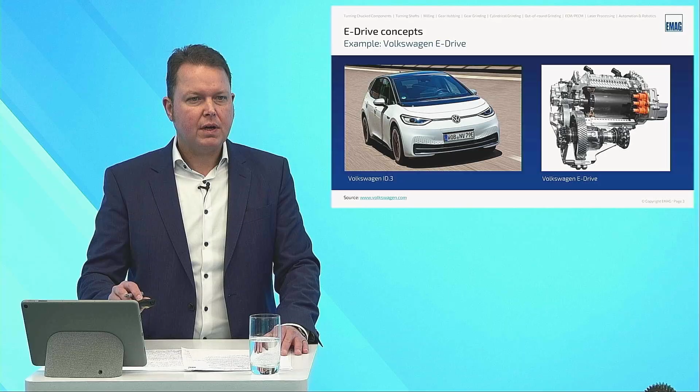This is a Volkswagen ID.3 on the left side, and on the right side we see the drive unit. This is the e-drive. It consists of the electric motor on the right side, and on the left side we have the transmission. If we dip somewhat deeper into the detail, we can see the drive structure.

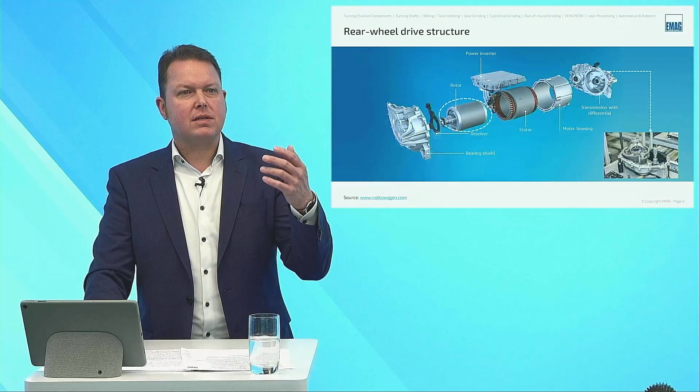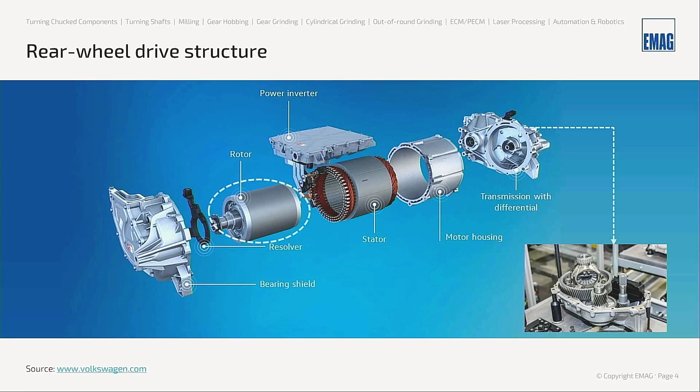It consists of the rotor shafts. In the middle left side, you can see the rotor, and inside it is the rotor shaft we are going to talk about today. Around it you will find the copper coil, which makes it the rotor. The rotor then sits into the stator. A motor housing covers the whole thing, and then we have a bearing shield assembled from the front. From the rear comes the transmission with a differential and its housing.

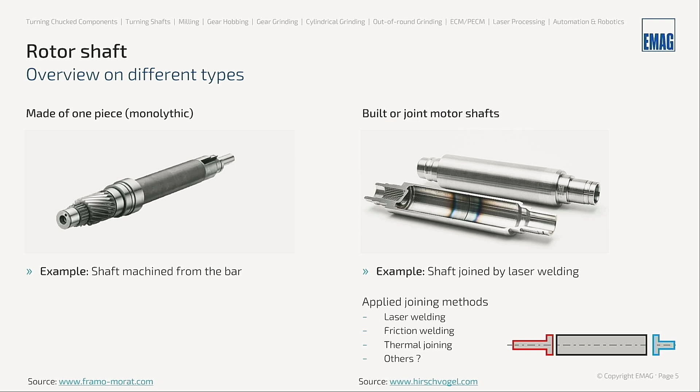Let's take a look at these different kinds of motor shafts that we know. We classify these as monolithic rotor shafts, meaning they are made of one piece, usually turned from the bar or from sawn pieces. Alternatively, on the right side, we have built or joined rotor shafts, consisting of at least two or even three pieces that are joined with a certain method - predominantly laser welding, or sometimes friction welding and thermal joining.

Another differentiator among rotor shafts is the interface to the gearbox or transmission. Here we see the e-drive again, with the left side zoomed into detail, showing the interface between rotor shaft and input shaft. This interface can be designed in different manners. For example, on the lower left side, we see a joined rotor shaft that has an internal spline.

The rotor shaft has the internal spline and the input shaft has an external spline. These splines are not actually considered two meshing gears - they just make sure we transmit the torque, which is how it transfers from the rotor shaft to the input shaft of the transmission. Of course, we can do this vice versa as well: the rotor shaft may be made with an external spline, and then the input shaft has an internal spline.

An alternative design is shown on the lower right side. This is a rotor shaft where we already have the geared section, meaning the rotor shaft and input shaft are more or less the same thing - actually one piece, so to speak.

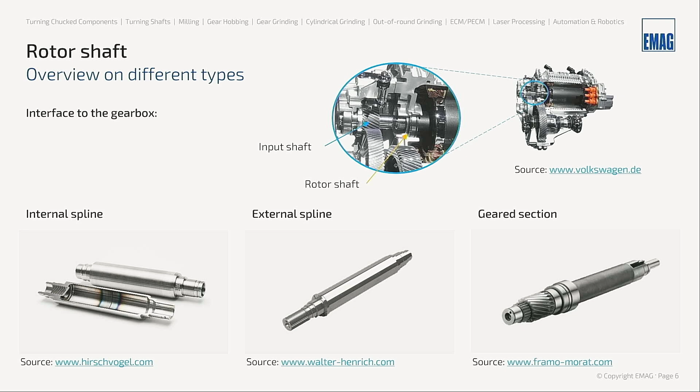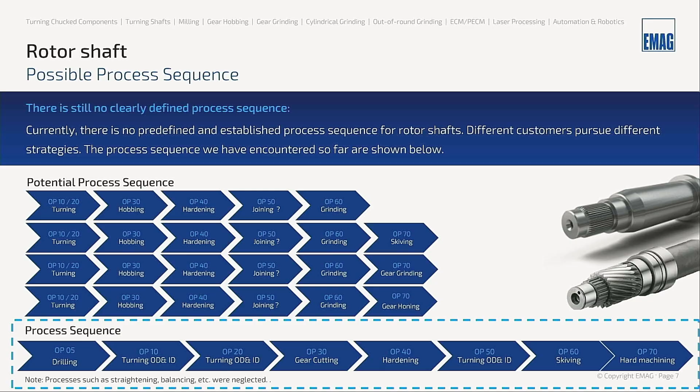When it comes to machining of the rotor shafts, first we should consider the final properties of the workpiece we have to machine, because this determines the potential process chains. So the properties of the final part define how the process chain should look. Here we have a couple of different potential process chains.

This is somewhat from the gear machining perspective. It usually starts with OP10 and OP20 turning, then comes hobbing. It may alternatively be power skiving, so soft gear machining. Then comes the hardening. There may be a joining process, but not necessarily. Then comes grinding, hard turning, or skive turning of the reference datums, the bearing journals for instance. And then we have a gear finishing process.

This can be skiving, that means hard rehobbing. Alternatively, depending on the accuracy requirements, it could be gear grinding, and depending on the rotor shaft's design, if we have adjacent shoulders or so, that could lead to interference with tools. We could also have, for example, a honing process.

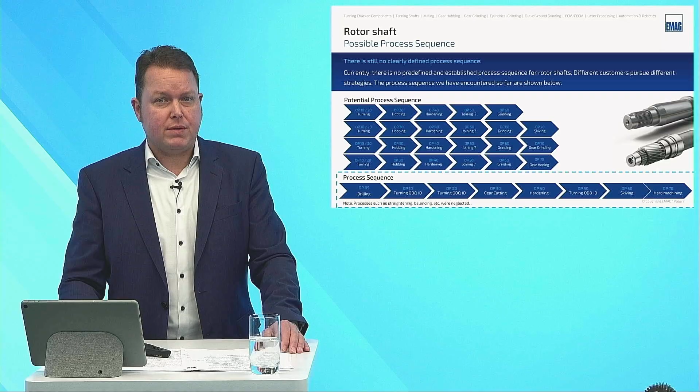Now we have highlighted one particular process chain, and I invite my colleague here in the studio, Matthias Obst, to explain this a little bit more in detail, please. Matthias. Okay, thank you, Jörg.

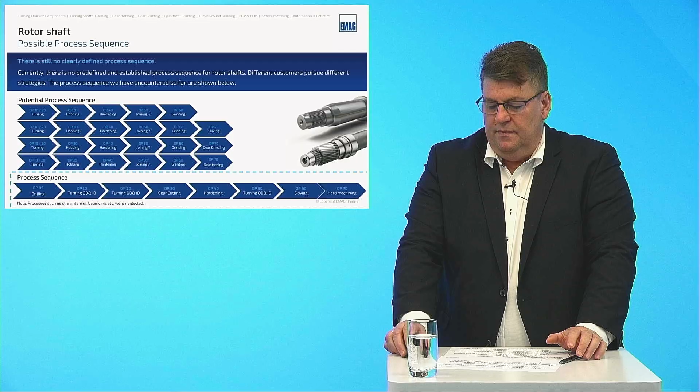We start with an overview of the process steps of soft machining in 4 sequences. First, we have a pre-machining using a pickup machine. Our VL series covers a wide range of part types. The next step, OP10, OP20, pre-turning with 4-axis turning machines from our flexible VT modular system. OD and ID are machined to create the reference geometry for the following processes.

After this, we come to the gear cutting. Our EMAG Köpfer portfolio machines gear cutting in the soft state. This step lays the foundation for the following hard machining operations. Concluding on soft machining, it forms the foundation for quality and cost-effective production.

Next step is detailed gear machining, presented by Jörg and Alex.

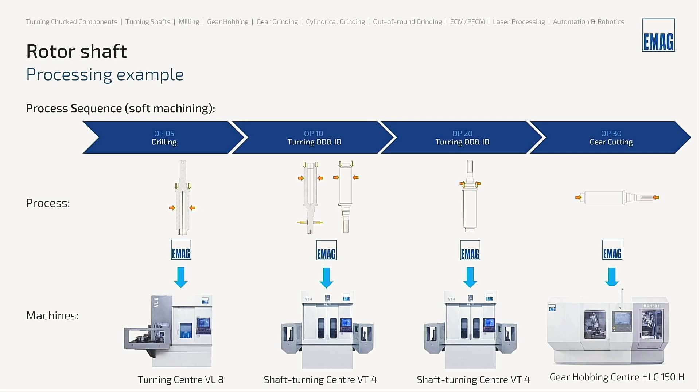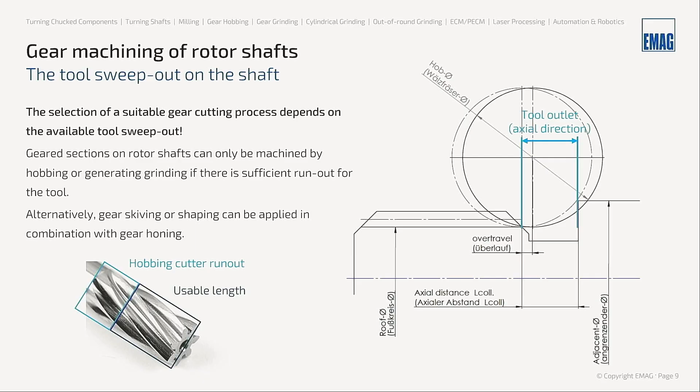So let's come back to gear machining, soft machining. I already explained that sometimes we have issues with interference to adjacent shoulders, and I would like to dip deeper into the detail. With the design of rotor shafts, there are actually different kinds. Sometimes we have enough sweep out for a tool. Here in this drawing on the right side of the slide, you can see the cross section of a workpiece with a spline, and you can see that at the final position of machining, there is the hob shown, or it could alternatively be a grinding wheel in its cross section.

Due to the fact that in hobbing and gear grinding, we usually have crossed axes, meaning the symmetry axis of the tool is nearly perpendicular to the symmetry axis of the workpiece, there can be problems with interference, as shown in this sketch.

On the lower left side, we can see how something like this may look in case a workpiece has been hobbed. This is now an armature shaft from an electric motor. You see that we have a usable length, and then there is an area that we cannot use. This is the non-usable length, the area of the tool sweep out where the teeth are not fully formed, so this section cannot be used. It depends on how many millimeters are available for this tool sweep out, and this can determine the machining process we should apply for each individual rotor shaft.

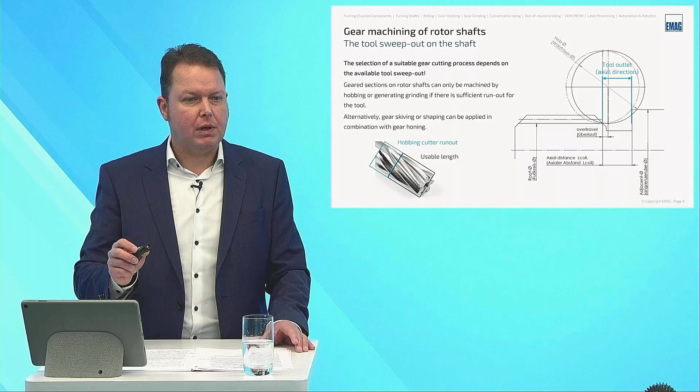Here is a very nice slide. We have taken a couple of pictures from the dissertation of Dr. Ruben Bauer from IWU Fraunhofer in Chemnitz. In his dissertation, he made this problem quite clear.

On the left side, you see in gray color this workpiece. It has a spline and also this adjacent flange or shoulder. You can see the three different soft machining processes: gear hobbing, gear shaping, and power skiving. In case of gear hobbing, you can see the problem that I explained a couple of minutes ago, so we have interference between the hob and the adjacent shoulder.

So this workpiece simply cannot be hobbed. We need an alternative solution, and this can be the gear shaping process. Why shaping? Simply because in shaping, the tool symmetry axis and the workpiece symmetry axis are parallel, giving us the smallest possible sweep out.

An alternative to this is power skiving. In power skiving, the process kinematics foresees an axis crossing angle, usually between 20 and a minimum of about 10 degrees. Accordingly, we also have a much shorter sweep out compared to hobbing processes.

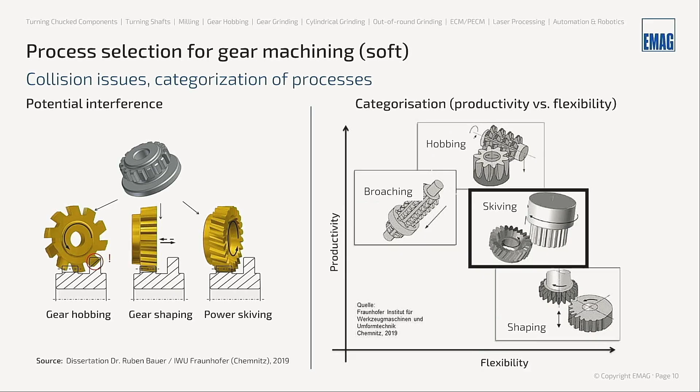On the right side of this slide, we have a nice categorization of these processes in terms of productivity and flexibility. There's the broaching process for machining internal splines. It's a very quick, single stroke process. The broaching needle goes through the workpiece with a single stroke, and the gear is finished.

Then we have the three processes: hobbing, skiving, and shaping. Hobbing is considered the most productive, most cost-effective process among these. Then comes skiving, considered less productive but with higher flexibility.

This is a point where I struggled somewhat, and I'd like to ask my colleague Alexander Morhardt. In this categorization, hobbing is considered the process with the highest productivity, and power skiving is considered the most flexible, or more flexible, compared to hobbing. From my point of view, one can discuss this. This is why I've introduced Alexander Morhardt from the business unit Gear Cutting Hard. Alex, what is your opinion on this issue?

Yeah, I think the skiving process is a little bit more flexible than the hobbing process. This has mainly to do with the fact that we can produce external and internal gears with this process. I think in terms of speed, skiving is not so far away from hobbing. When you see how fast we go with the tools through the workpiece, it's maybe nearly the same speed. Only we have the backstroke, which doesn't do this, and I think this is the difference between hobbing and skiving operation.

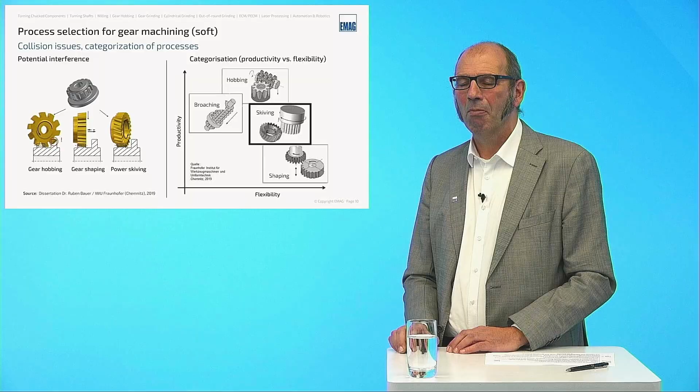So I would summarize: among the processes hobbing, skiving, and shaping, skiving can be considered more flexible due to the fact that it's possible to machine workpieces with an adjacent shoulder. We can power skive internal and external gears as well - this is not the case with gear hobbing. Therefore, I think one can agree skiving is probably more flexible compared to hobbing and broaching. Well, I think shaping doesn't really play an important role when it comes to machining rotor shafts.

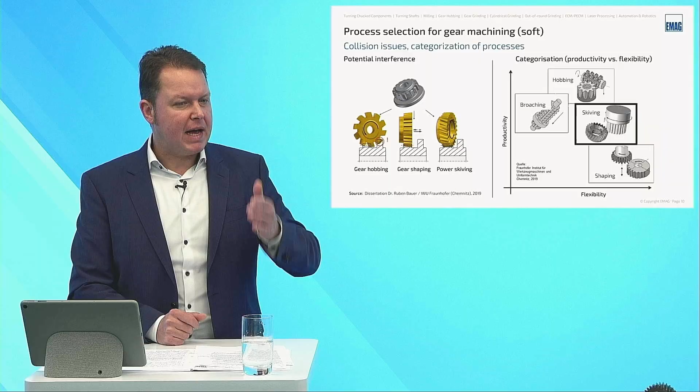So the processes that have a kinematics of continuous character, such as hobbing and skiving - more or less, since we have backstrokes in between - are probably also considered more appropriate for machining rotor shafts.

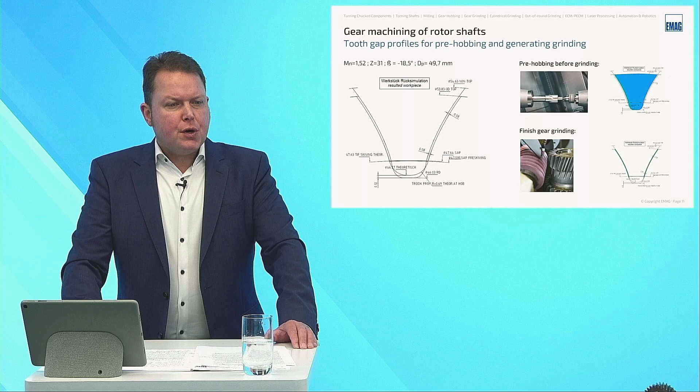Now, in this slide, we see the tooth gap of a rotor shaft. Here, module 1.52, 31 teeth. Helix angle is minus 18.5 degrees, meaning left-hand helix. Pitch diameter 49.7 millimeters.

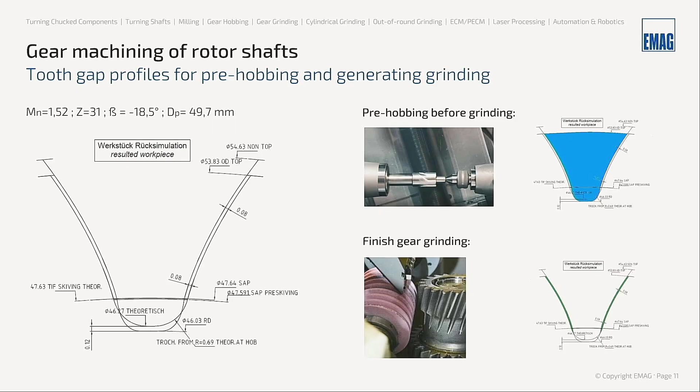This is the gear data, and we see the tooth gap in normal section, a typical profile design. We can see that the hob actually removes about 95% of the material, and the hob is usually designed so that we leave some stock allowance along the involute tooth, which is then removed later in the hard fine machining process. This can be generating grinding, skive hobbing, or honing.

Here we can see a comparison of the different accuracy classes after each individual process step. Here we see the inspection chart, the first side of the inspection chart from a gear inspection machine.

We see 3 measured teeth each. On the upper side, you can see the profile, and in the lower side, you can see the lead. And here, after hobbing, we have achieved an ISO class 7.

This is the ISO standard 1328-1. Then the workpiece goes to hardening, and depending on the kind of hardening process, we have a quality loss. Here it's considerably high - we lose 2 or even 3 classes, so we end up in ISO class 9 to 10. After hardening, the workpieces will later be finished ground by generating grinding, and then we end up in an accuracy class ISO 6 without problems.

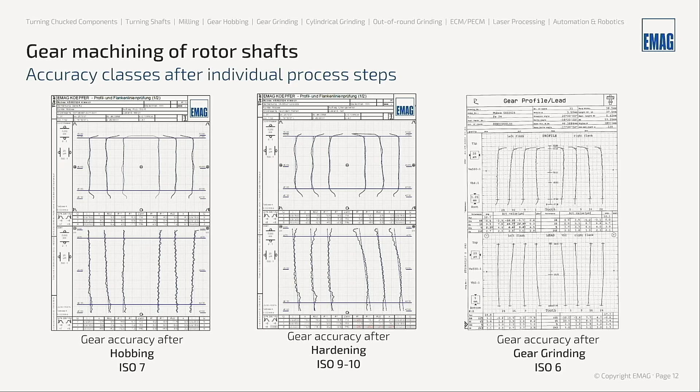There is one particular product within the EMAG product portfolio that I would like to highlight, and this is the HLC 150H. With this machine, there's plenty of possibilities to machine rotor shafts. It is a gear hobbing machine, horizontal style, with integrated gantry loader. We can hob rotor shafts with this machine, but we can also skive them - that means, in this case, hard rehobbing. But due to the fact that this machine has a special kind of machine kinematics, we can use it also for power skiving processes of external gears on rotor shafts.

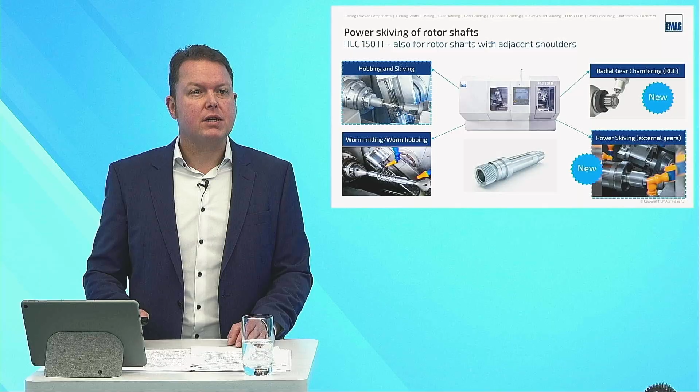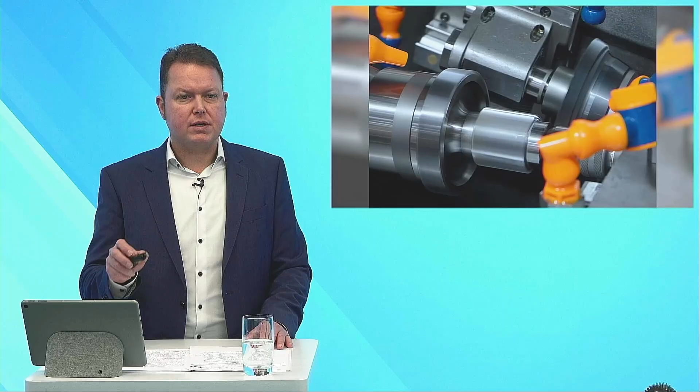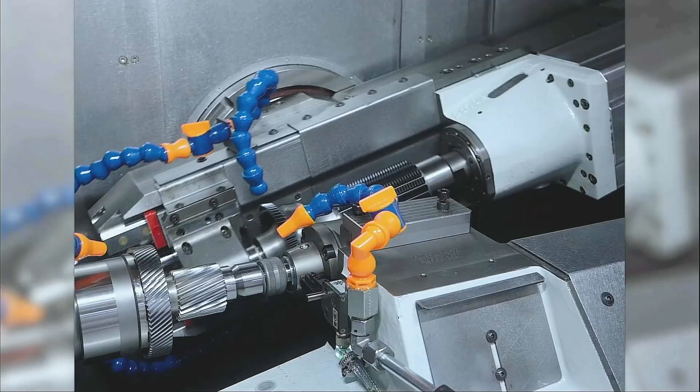I'm now going to show you a movie not of a rotor shaft, but from another important workpiece of an e-drive, and this is the stepped pinion. The stepped pinion has 2 different geared sections, one smaller and one larger. Here you see power skiving of the smaller gear. Now we move over and swivel the head, shift to the hob, and then we hob the external gear. That means we have the perfectly fitting process for each individual gear.

Important is also that these 2 gears have a very precise orientation requirement - there is a defined angular position among the 2 geared sections. Due to the fact that we machine both gears in one setup, we have no problems fulfilling this challenging requirement at all. Here you can see the gantry loader.

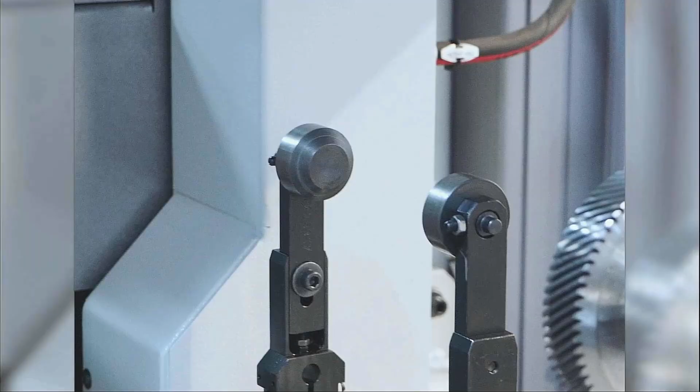This is a linear gripper for workpieces up to 10 kilograms, diameter 150 millimeter. There's the swiveling unit that picks up the workpieces from the magazine and presents them to the gantry loader, then swivels them downwards onto a conveyor belt in order to deposit them.

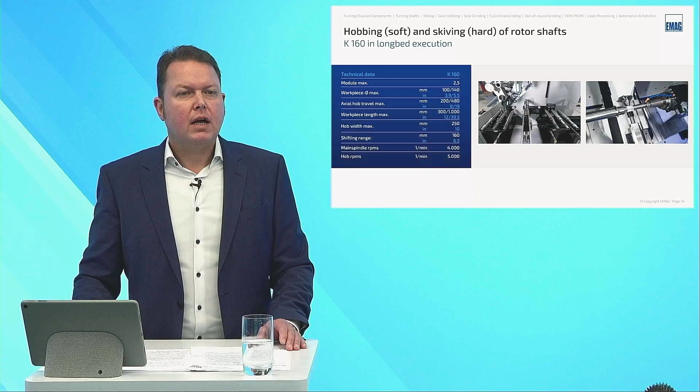Another example, a typical rotor shaft application, is a spline. This is the K160 gear hobbing machine, still horizontal style, in long bed execution. That means we can hob workpieces up to a length of 1,000 millimeters, maximum module 2.5 millimeter. It is also equipped with a gantry loader.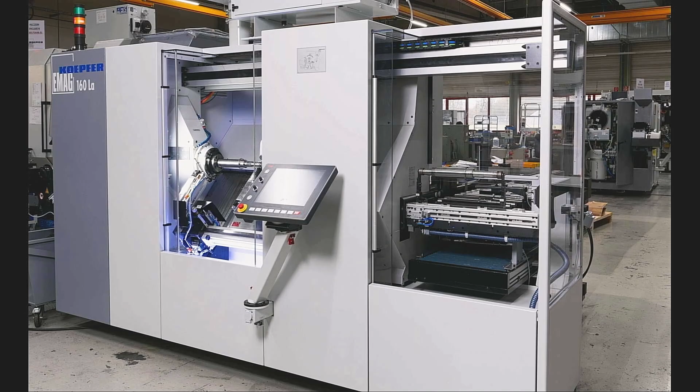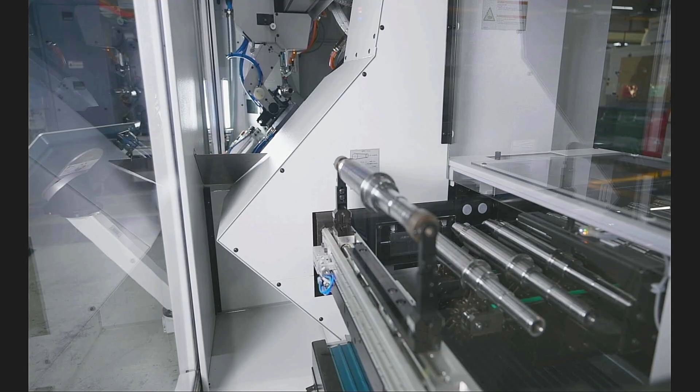It's a high-speed loader, aluminum design, double rotary gripper that takes care of the workpiece handling. Here we are in the work area, and the gantry loader exchanges a blank with the finished part. Now we do hobbing, and as you can see, we have a considerably high feed rate. This is also acceptable in this case, since it is pre-hobbing prior to skiving, so we have permitted a depth of the feed scallop marks of even 10 microns.

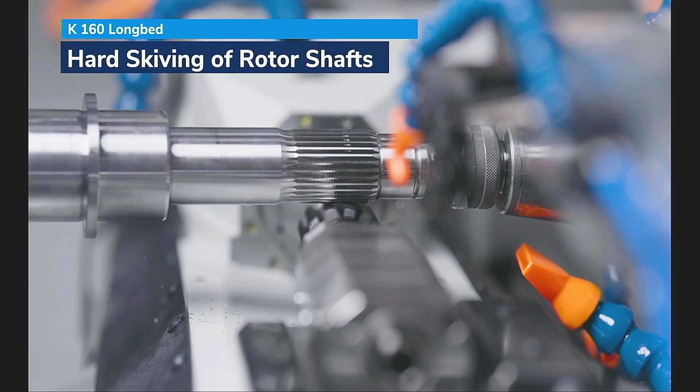Here is a chain magazine and a deposit belt, and the distributor who picks up the parts from the magazine. Now comes immediately hard fine machining - this is now hard skiving, hard rehobbing of the previously hobbed gear. This requires 2 different profiles as shown before, since we only remove material on the gear's flanks.

Here we have a different kind of automation. This customer wanted us to have a chain magazine coming from the front, depositing the parts on the rear. Now comes the auxiliary tool - this is the skiving probe. It's an inductive sensor with a blow-off nozzle that keeps it clean from swarf and dirt.

This is necessary in order to synchronize the hob with the workpiece. So we apply an offset on the C-axis and make sure that we find the tooth gap with the degree of precision that we require, in order to make sure we remove material on both flanks in the same way. Here, automation system, 2 chains, and the workpieces will be deposited towards the rear of the machine.

Right, so let's come back to the topic of process chain. My colleague Matthias is going to show us another example of a process chain that has been realized on EMAG machines. Matthias. Okay, thank you.

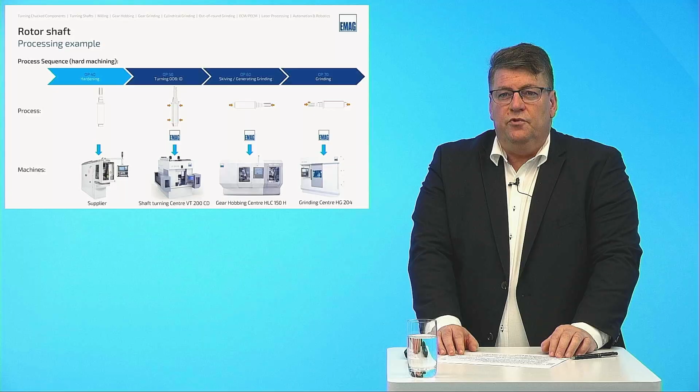Now we will show you an overview of the hard machining process steps in 4 sequences. First, induction hardening delivered by a supplier. After hardening, we go into a turning machine, VT 200 CD, which is a center drive machine. This machine concept allows different finishing operations to be done efficiently. Heat deformations are corrected and the dimensions are made very accurate.

Next step, power skiving or gear grinding, depending on the quality of the shaft. This process enables exact finishing of the gearings. Shape and position are kept very accurate.

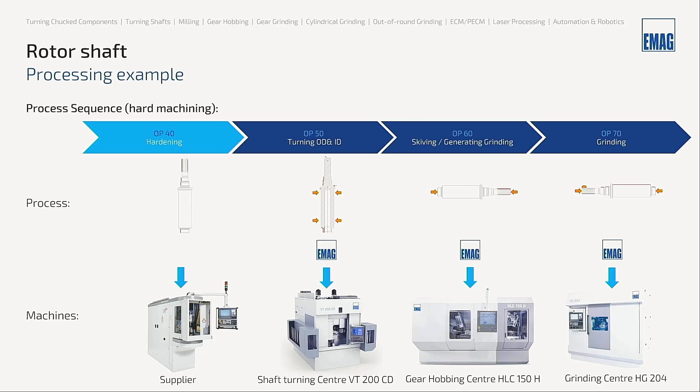Last process, the hard machining. Final machining is performed by grinding to the required tolerance and surface quality. Concluding on hard machining ensures the final dimensions, surface quality and functionality of the rotor shaft. The next step is detailed hard turning and grinding, presented by Yannick.

High rotational speeds and high torques in electric powertrains lead to very tight tolerances, especially with regard to the runout of rotor shafts at the bearing seats and the rotor seats. In this context, machining in one operation is a big advantage to achieve these tight tolerances and to have a very flexible machine concept.

My name is Yannick Röttger. I'm responsible for technology and technical sales in the business unit grinding, and I'd like to introduce you to our answer to this challenge: the complete machining of rotor shafts in one clamping on our machining platform VTC 100 or 200 GT.

These machines with vertical spindle layout are designed to manufacture shafts up to a length of 400, respectively 600 millimeters, and a diameter of 100 millimeters, respectively 200 millimeters.

In the center of the machine, we have the main spindle on top, meaning it is protected from grinding dust and from coolant. On the counter side, at the bottom of the machine, we have the NC tailstock, where the dressing spindle is also fixed.

On the right side of the machine, you find the 30 kilowatt CBN grinding spindle to perform all the grinding operations on rotor or gear shafts.

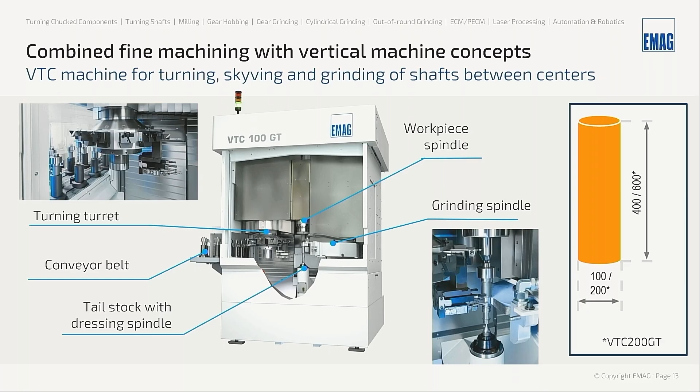Which tasks are done within this machine concept? We have the double gripper on the turning turret to load and unload the parts within a workpiece changing time lower than 10 seconds. We perform the conventional turning operations for shoulders and grooves, and we have a Y-axis to

perform also skiving to machine very high material in a short time for the pre-machining of the bearing seats and the machining of the rotor seats.

The CBN grinding spindle is used only to remove the last microns of material to achieve the required surface qualities with regard to their tribological behavior in the bearing contact. On the turning turret, it is also possible to place live tools there to mill grooves and other applications.

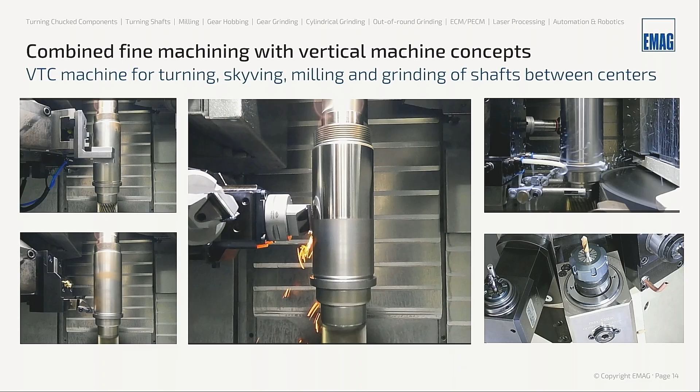Here we have a look at the machining of a rotor shaft. We start with the axial positioning by means of a measurement probe. We machine the shoulders in a hard turning process, so we have no problem with grinding burn on the flat surfaces. We machine the groove next to the spline geometry.

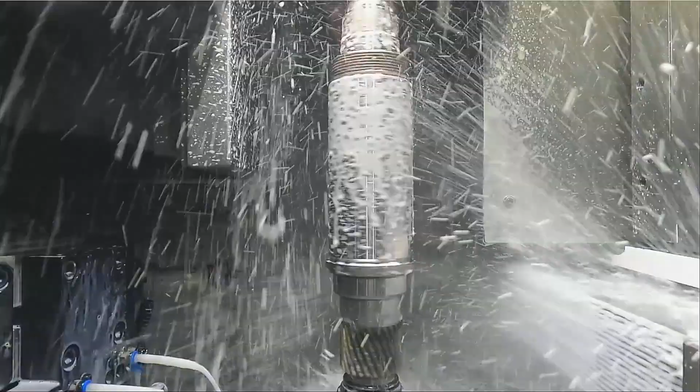Then we do the pre-machining of the bearing seats by means of skiving technology. We see very high material removal rates with very little tool wear. And only for the bearing seats and the sealing counterface, where we need very small surface roughness and specific tribological behavior, we perform a grinding process with an in-process gauge to achieve the diameter tolerances.

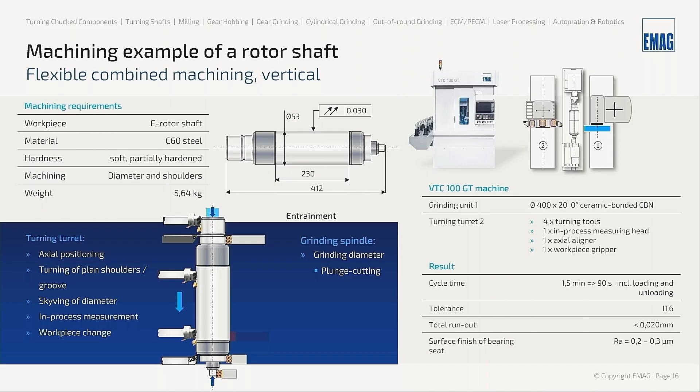So I'd like to sum up the advantages of this multifunctional production machine, where we perform various technologies in one clamping. We can do the complete machining with hard turning, skiving and grinding with in-process measurement to achieve the lowest form deviations and very small diameter tolerances.

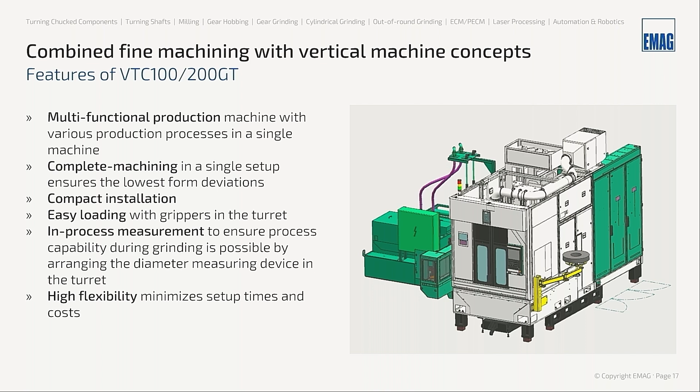We have a very compact layout, so very little space requirement on the shop floor, and especially the in-process measurement makes the process capability very, very good, and we have the possibility to machine different types of workpieces with different lengths, with different diameters, just by means of a change in the NC program without any change in the tool setup. Thank you very much for your attention.

In the case of a built rotor shaft, meaning when the rotor shaft consists of 2 or 3 single components, laser welding is the preferred technology. For laser welding, in many cases, other sub-processes are necessary. So to get these process chains in the right solution, in the right constellation, is a key factor for the productivity of a system.

I'm Konrad Eibel from EMAG Business Unit Lasertech, and I will show you an example of one of our delivered solutions for the mass production of a rotor shaft for passenger cars.

The system here is for a 2-piece rotor shaft, and 4 process steps were used, meaning laser cleaning, pressing, preheating, and laser welding.

First of all, the parts were brought to the system on a pallet conveyor system, the single components. There they are picked up by a gantry, which brings them first to the laser cleaning machine. The laser cleaning machine has a rotary table, in order to assure the shortest non-productive times.

Here in the laser cleaning machine, the weld areas of the single components are cleaned from organic substances such as cutting fluids, washing residuals, or, for example, rust preventatives.

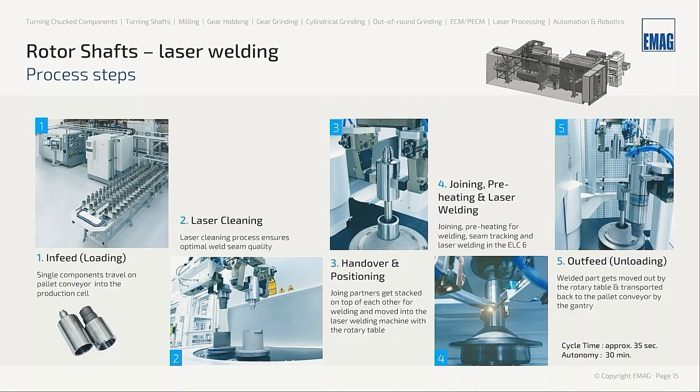Now, the single parts have tolerances, and now they have also been preheated. So to ensure a welding process in the required tolerances, a seam tracking is necessary. For this, we used our own EMAG Easy Seam system.

That means during the weld process, the workpiece is rotating and the weld beam is more or less standing still. However, since we have done a seam tracking right before welding, the weld head will adjust during the weld process live.

After the weld process is finished, the parts are transported out to the loading side of the ELC6, and then the gantry brings them back to the pallet conveyor system.

So what you see here now is a fully automated system, and everything came from EMAG out of one hand for the customer.

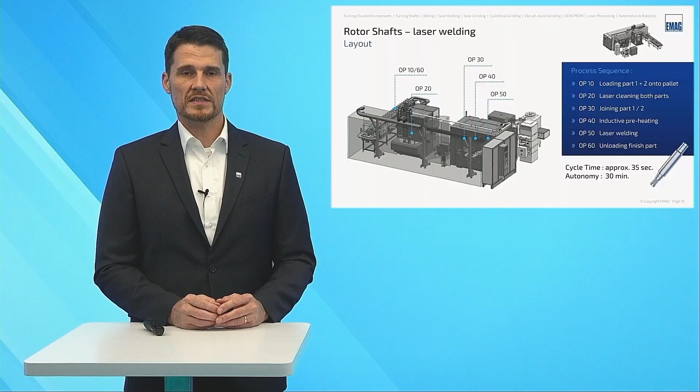Here's another look at the system. Again, OP10 and 60 were load and unload of the pallets. OP20 is the laser cleaning system. OP30 to 50 are done in the laser welding machine ELC6.

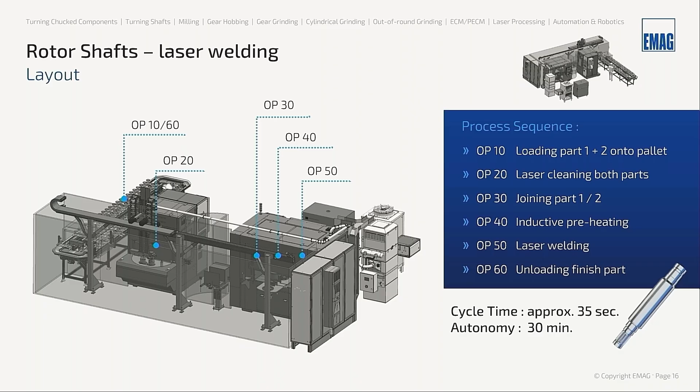As I've said, everything came from EMAG, and also this includes the processes. And this is why I want to show here at our facility in Heubach, Germany, we have our laser application center where we have the right equipment and most of all also the right personnel to support the customer with first weld tests, small series pre-production, or also a complete process development.

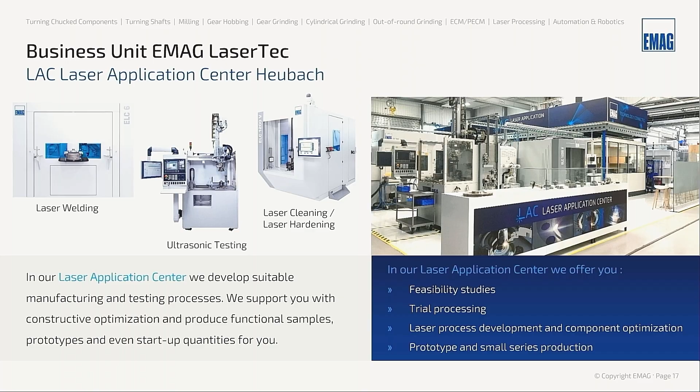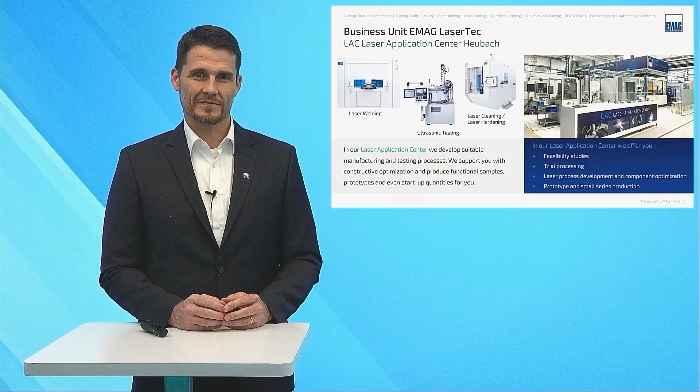In this case, we offer a technology partnership with our customers, and if this is done right from both sides, everybody can profit from the close cooperation. If there are questions on this, please do not hesitate to contact us. Thank you.

Okay, thank you, Konrad and Yannick. Now we are jumping to the generating grinding process.

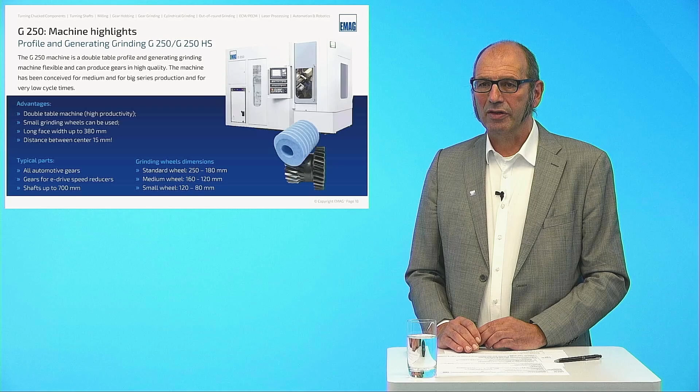We are normally using for the rotor shafts a machine called G250. The maximum diameter here is 250 millimeters. On this machine, we can do profile and generating grinding. The advantage of this machine is that it's a flexible and highly productive machine. It's really a good machine for mid-size and high production.

What does it mean? We have a high productive machine. High productive machine means this is coming out of the double table. So we have here an area where we load and unload the part, do the meshing, and then we have an area where we grind the part and then swivel it around after the grinding operation is ready.

All other parts can also be produced on this machine, all automotive gears, parts for e-drive, or also long shafts up to 700 millimeters. But flexibility is more coming out of the grinding head itself.

There we have two possibilities. We have a standard grinding head up to 8,500 RPMs, and then we have a high-speed head up to 20,000 RPMs. There is a tool arbor in the machine, this direct-driven grinding head, and we have a tool arbor there, and we can mount different kinds of grinding wheels. But also we can remove this tool arbor completely and set a spindle nose in where we can put also very small profile grinding wheels on, for example, when we are making small gears with interference for gear motors, which have a small diameter.

So here the distance between the main axis is only 15 millimeters. With a 30 millimeter wheel, we can grind to zero. Also, this machine has the possibility to produce a face width of 380 millimeters, so it's not so important where the wheel is placed in the working area.

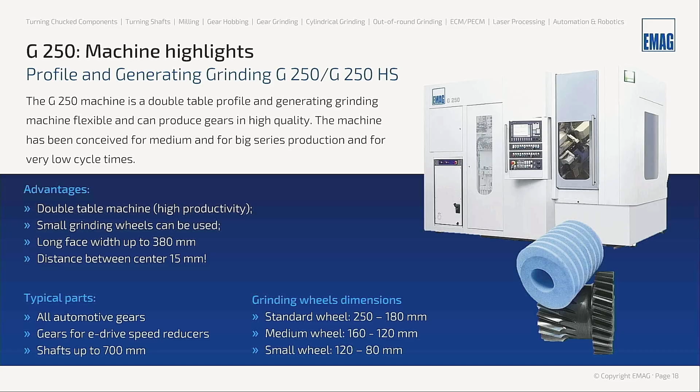So we are absolutely well prepared to produce rotor shafts, which normally have an interference with these small wheels, with a dressable ceramic worm wheel.

This is also necessary. We must produce, of course, high quality, but also there are sometimes special modifications needed in the gear. So here we have also the mandatory software on this machine. We have bias control software so that we can make modifications in the bias and also correct these.

And this is very nice on this kind of machine because we have a visualization on the screen, and the operator can look in which direction he does correction, or in general, when he is setting up the machine, he can look directly what is going on, what the machine will do, without grinding anything. So it's a very fast setup, and also during the process, the correction can be done very easily.

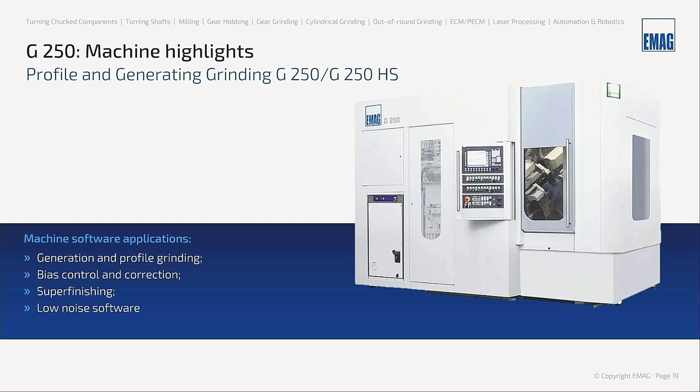Then, of course, we have the possibility to have super finishing on this machine. This can be fine grinding, or this can be also polishing grinding. And, of course, we have software to make modifications in the surface itself to have a low noise gear at the end. So let's have a look at how it works in the machine.

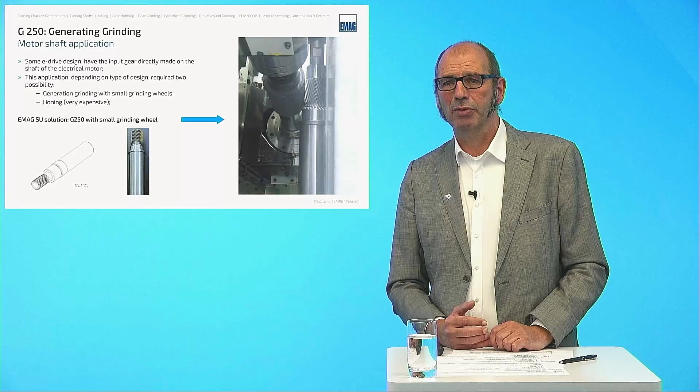When we have such a rotor shaft for the finishing operation, there are only two possibilities. One is generating grinding and the other one is honing. With generating grinding, I think we are much cheaper than with the honing process. And especially here on this machine, which is very, very stiff, we can produce this really in a good way.

On the photo on the right side, you can see a grinding wheel with the dimension of 120 millimeters in OD. And so here we do this process on the machine.

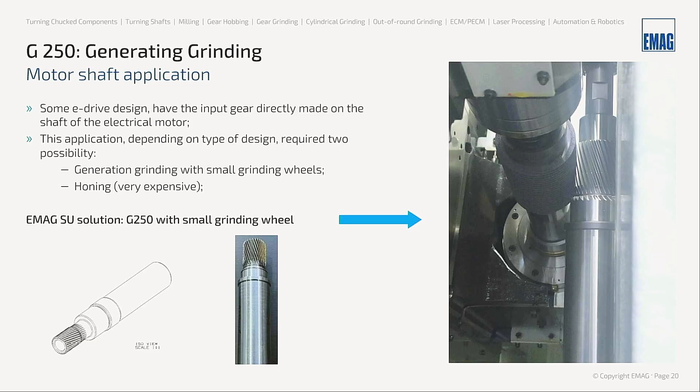Also, meshing is an important point in this machine. We have this installed on the loading and unloading area, so it works in a similar way as Jörg mentioned before. So we have an inductive sensor. This is mounted on a retractable arm and can adjust in diameter and also in height.

And it's swiveling in when the workpiece is loaded, and then we do some RPMs and check where the gear is located. And then also here we can do a C correction so that we mesh with the grinding wheel directly into the workpiece and remove the same stock on the right and the left flank.

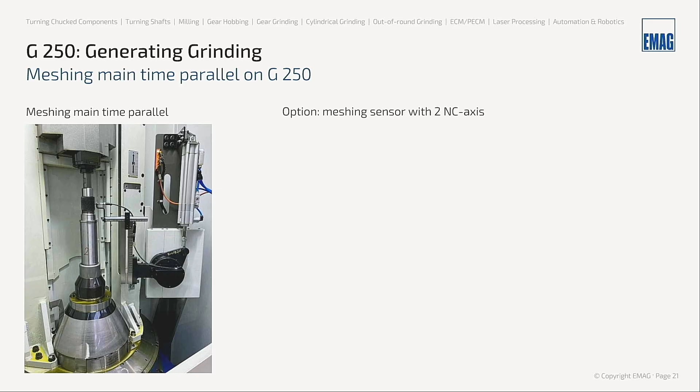This is one possibility, and there is also another one. This is when we didn't have this retractable arm, that we do this with 2 NC axes, so that we drive the inductive sensor automatically to the workpiece.

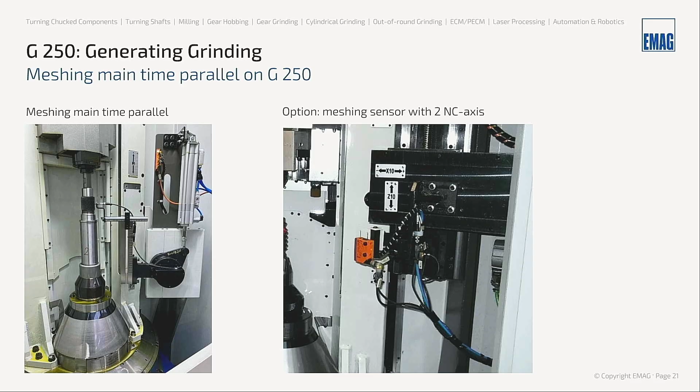Also here, it's possible that we also check the runout of the part with an additional probe on this automatic meshing unit. And this is necessary also when the setup times must be very short, then we can use this kind of NC axis in the machine.

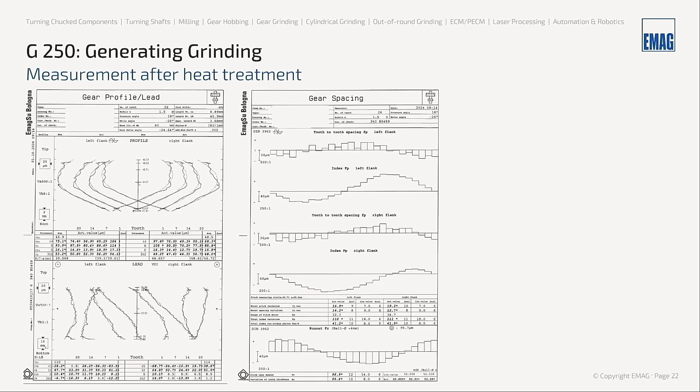This is also a heavy machine at 14 tons, and also some special equipment in the tower where the 2 direct spindles are mounted, so that you can reach this kind of quality level very easily.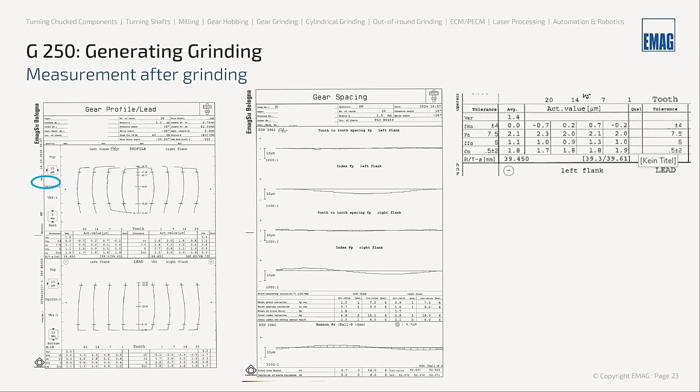So now I think we jump over to the layout of the rotor shaft, and I will give the word back to Matthias.

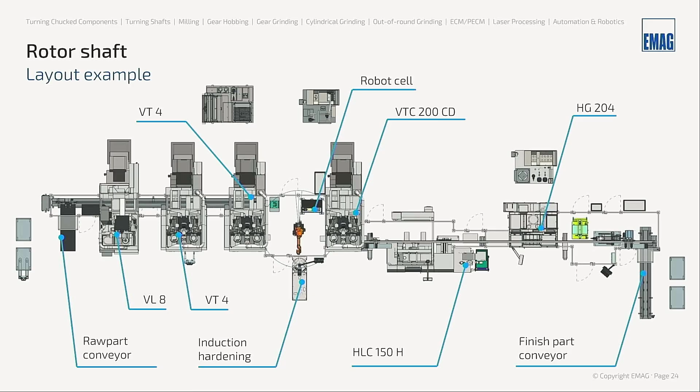Now you see a line for soft and hard machining. We have all machines delivered by EMAG: the turning machines, hobbing machines, grinding machine, robot cell, and automation are completely supplied by EMAG. Their line cycle is 90 seconds.

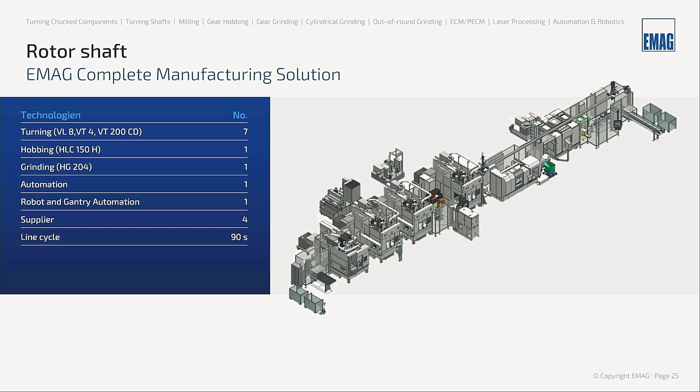Next example is the single concept machine on the VT, a flexible, modular system. You see on the right side a picture with a gantry loader system and a measuring unit. So we have it aligned on a central conveyor system. And the construction kit allows a lot of different machining on this type.

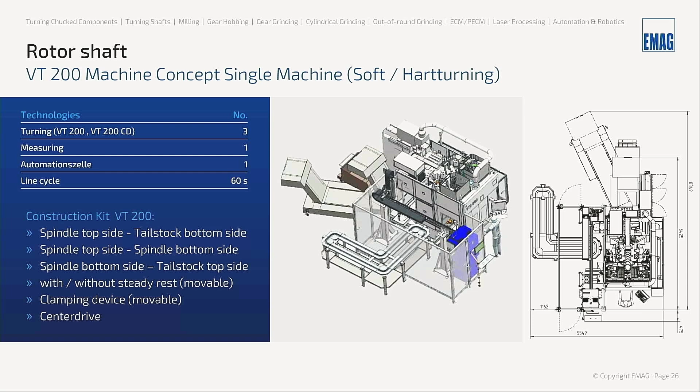Next point, the reference for complete or realized projects: solid shafts, complete lines, machining lines, several independent single machines, machined or assembled rotor shafts and rotor package, and hollow shafts, individual machining delivered by 2 suppliers, MEB, SSP, and polygon rotor shafts.

Before we close, we would like to leave you with the following message: EMAG is the point of contact for the complete process sequence.

You benefit from EMAG's product portfolio, extensive experience in rotor shaft manufacturing, one face to the customer, complete process from a single source, experienced project management team including construction site management, and global presence.

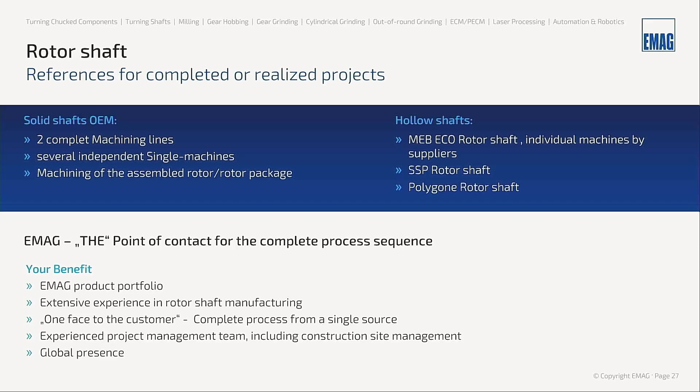So in the meantime, we have received questions. Let's start with the first one. It says, what determines the flank allowance? That means the machining allowance for hard fine machining of the gear teeth.

Well, I think this is a question for you and me, Alex. Yeah, first and foremost, I would say it depends on the module of the gear. So the bigger the module, the more stock allowance is usually required. And of course, it is also determined by the hardening method and the distortion that is to be expected. This is actually what determines the allowance. What would you say, Alex?

Yeah, absolutely. To give an example, this kind of rotor shaft we showed before on the G250 was around 0.1 millimeter stock on the flank, so that's just an indication. I think this is pretty much the same with skiving, hard rehobbing, and it's usually around about 80 microns up to 120 microns.